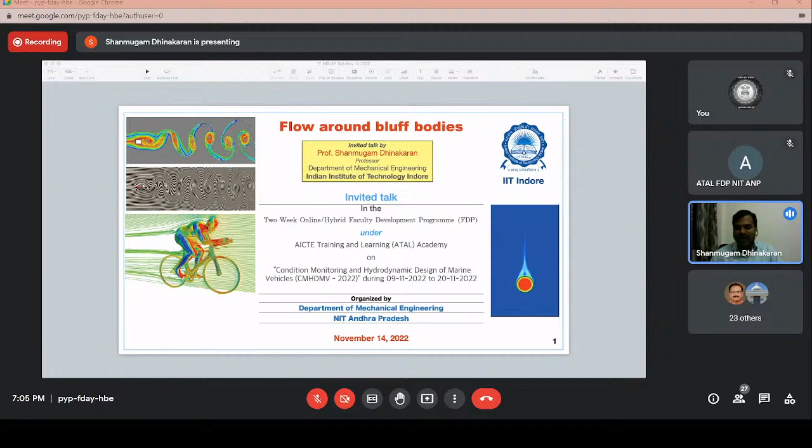I hope my slide is visible to everyone. Yes sir, it's visible. Thank you, I'll be giving about a 1 hour lecture on flow around bluff bodies. This is mainly a computational work. We work in the area of computational fluid dynamics. We do simulations using finite volume methods and lattice Boltzmann methods, using both ANSYS Fluent and OpenFOAM software.

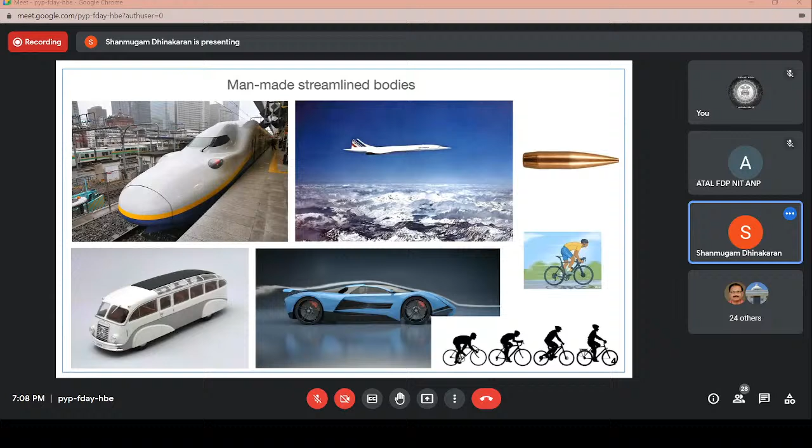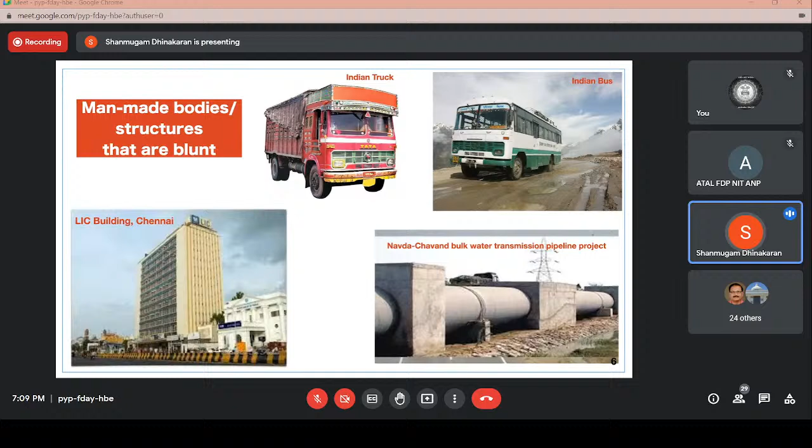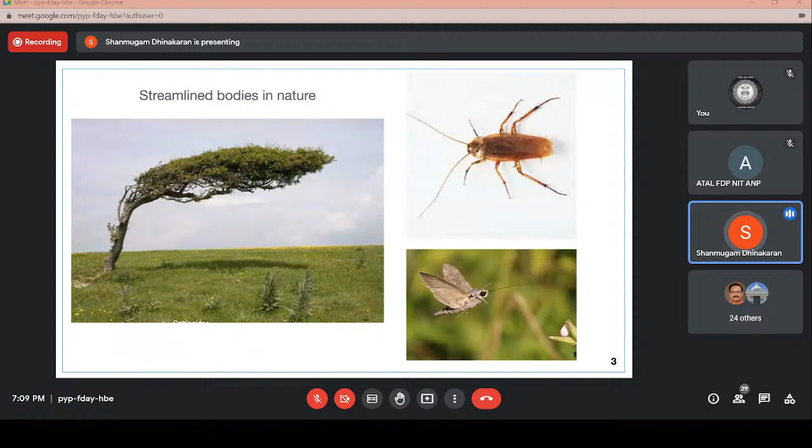Bluff bodies, as I told you, there is a significant difference between the streamlined body that you can see here, the fish, similarly this tree, these vehicles, and the birds here. The bluff body flows - what is a bluff body flow?

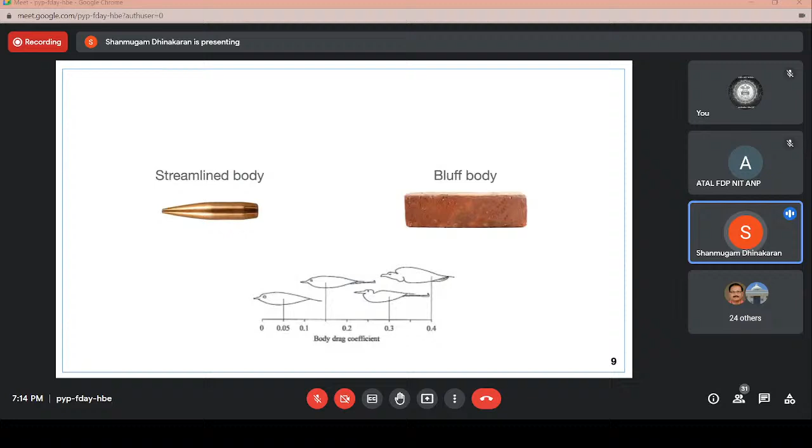In the coming slides, I'll be explaining what happens when fluid flows over a bluff body. As I told, flow over bluff bodies finds practical applications in cooling of electronic components, in heat exchanger designs.

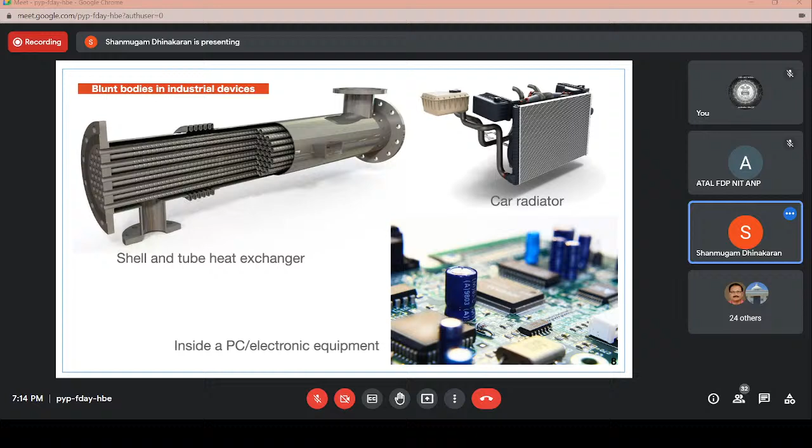This is something like during the summer season, when you try to cross the river, when the water level is less than the knee - you could see that behind your leg, two recirculation regions form. The water will be rotating. That is called the separated region. The flow velocities will be negative because fluid moves in the negative direction - it keeps rotating.

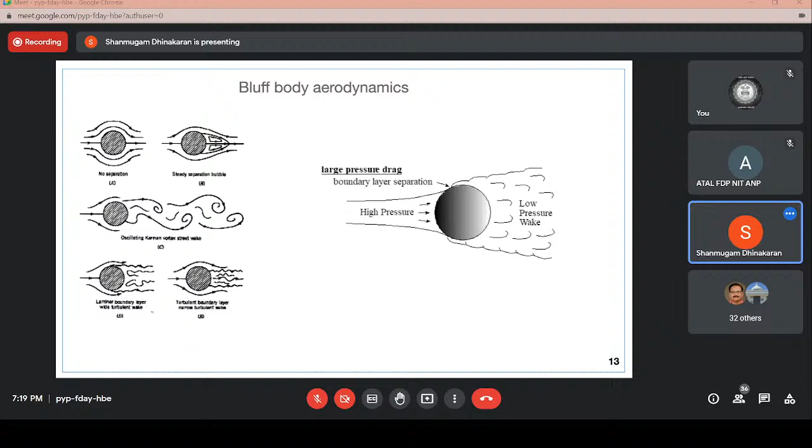It seems the side mirror accounts for 7% of the drag on the car. So in foreign countries, some car companies have removed the side mirrors and instead placed cameras, so that the drag due to the side mirrors reduces and we can save some fuel.

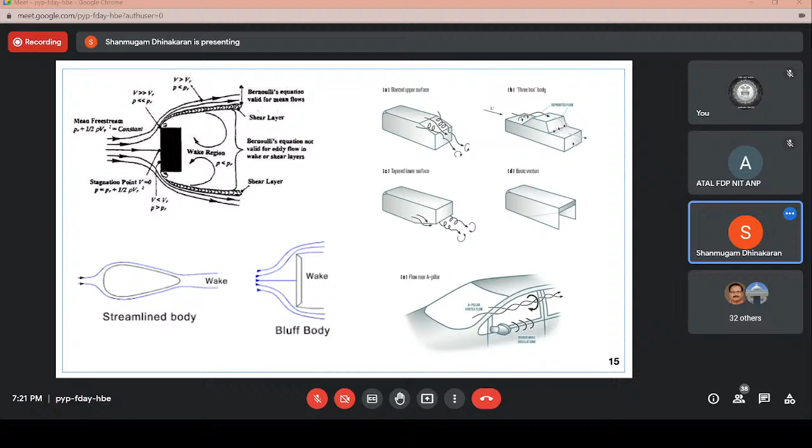This is the vortex shedding. So what really happens is that when fluid flows over a blunt body, such as a circular cylinder, flow separation takes place, and this vortex keeps on growing.

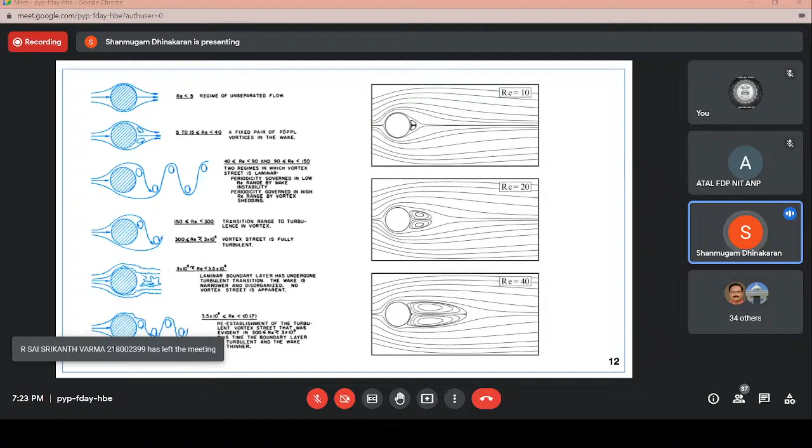When it reaches a certain Reynolds number, it cannot remain symmetric for longer. The vortex that is formed on the surface becomes unstable and starts shedding. Here, this one is a streamline, this is not a vortex.

In case of unsteady flow, the strength of the vortex changes. A vortex is nothing but recirculation. As I gave an example, if you cross a river during the summer season, behind your leg you can see vortices. The same thing is shown here.

When the fluid velocity is very high, the vortex on the top surface grows, and then on the bottom surface the vortex also grows. The top surface vortex keeps on growing and becomes unstable. That is the reason why it is cut off from the main cylinder and shed, as you can see, forming a row of vortices.

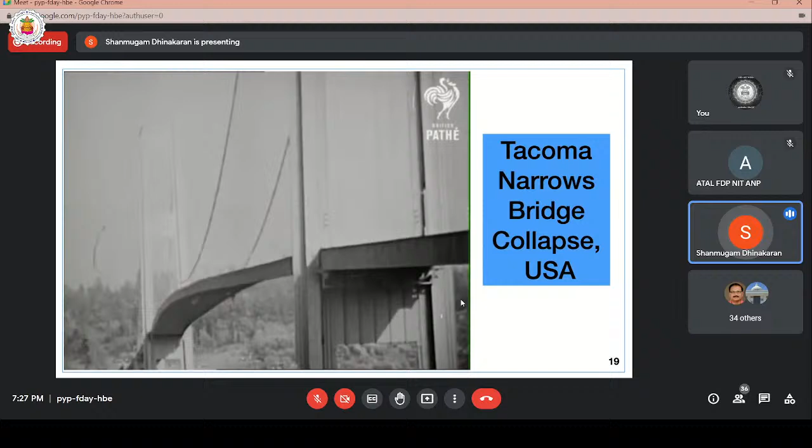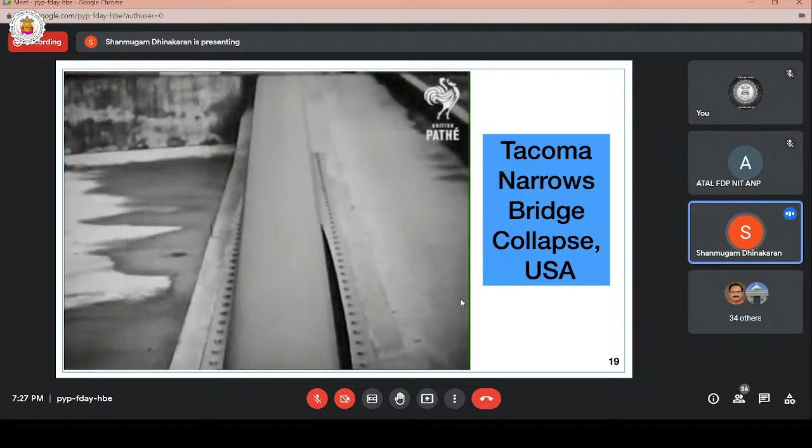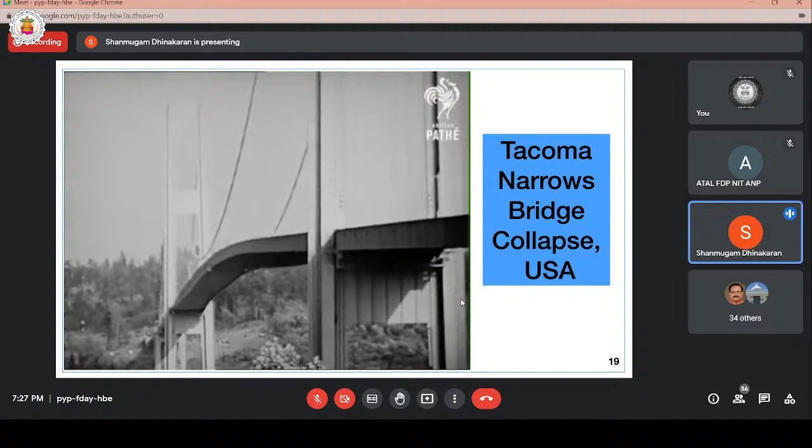Only a 35-mile-an-hour wind is blowing, but this apparently sets up a rhythmic swinging of the bridge, which increases with each swing.

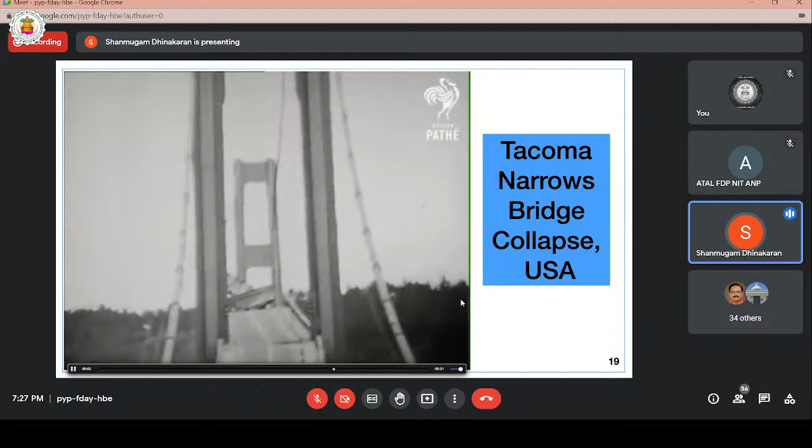Finally, the swinging road and the suspension cables give way and plunge into the water below. Fortunately, the only casualties were a car stalled on the bridge and a dog.

This bridge collapsed in the USA due to unsteady aerodynamic forces.

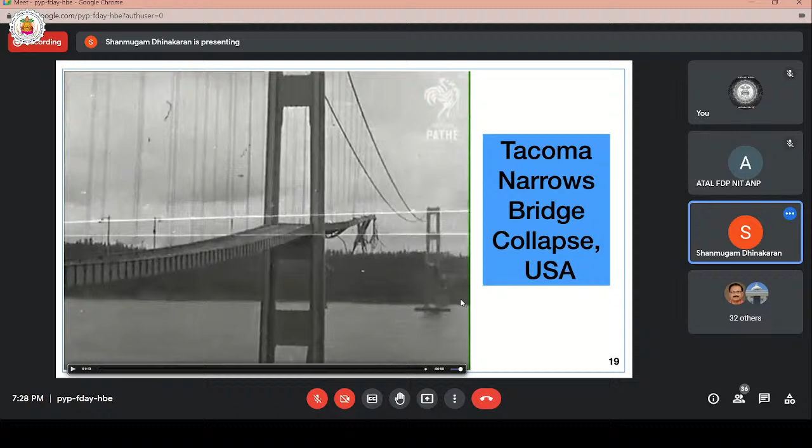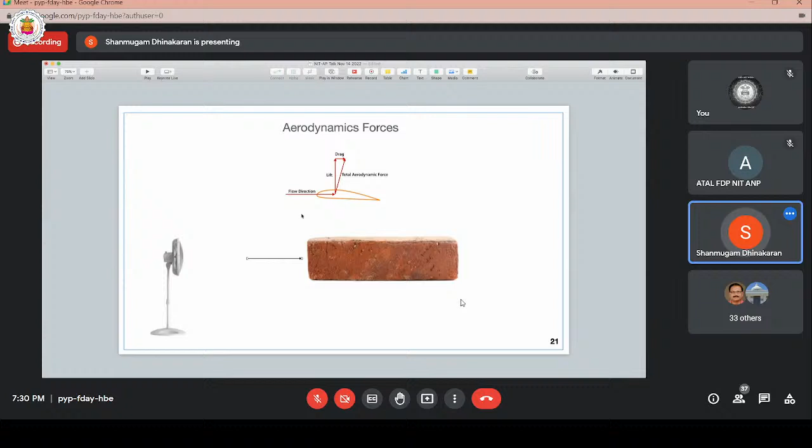When air flows, this is the pressure force acting on the front surface of the bluff body. This one is also the pressure force, but it acts in the opposite direction on the rear surface. This one is the viscous force, or shear force, acting on the top surface, and similarly this is the shear force acting on the bottom surface. So pressure force acts on the front surface, pressure force acts on the rear surface, viscous force acts on the top surface, and viscous force acts on the bottom surface.

All these forces are in the horizontal direction, so this gives rise to drag. Drag is due to the pressure forces on the front and rear, and the viscous forces on the top and bottom.

Similarly, when a fluid flows over the surface, shear forces also act on the surface. I'll draw this. This is the shear force acting tangential to the surface, marked in red. This force will try to push the body up. Similarly, the viscous forces act on the rear surface also, but in the opposite direction.

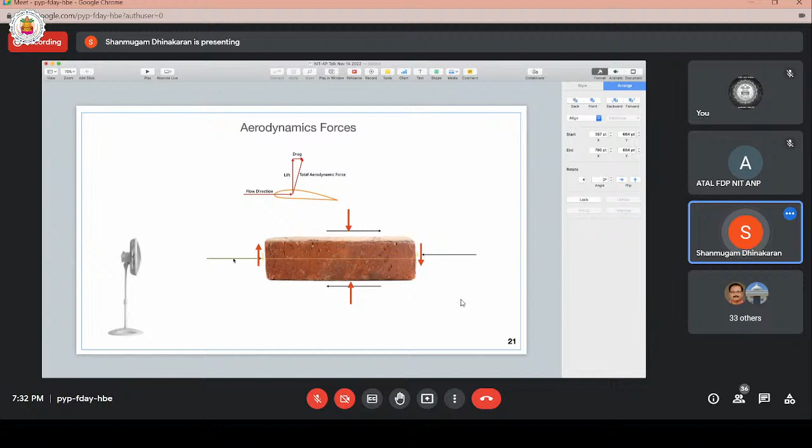Once we are able to know the pressure forces acting on the body as well as the velocities, from the velocities we can find out the shear stress: Tau is equal to mu times dou u over dou Y.

Firstly, I'll show you one of the works that we have done on bluff body flows. It's a very simple geometry. What you see here is a square body placed close to a moving wall. This is the same as you have a car, for example this one. You have a car, this car is considered to be a bluff body.

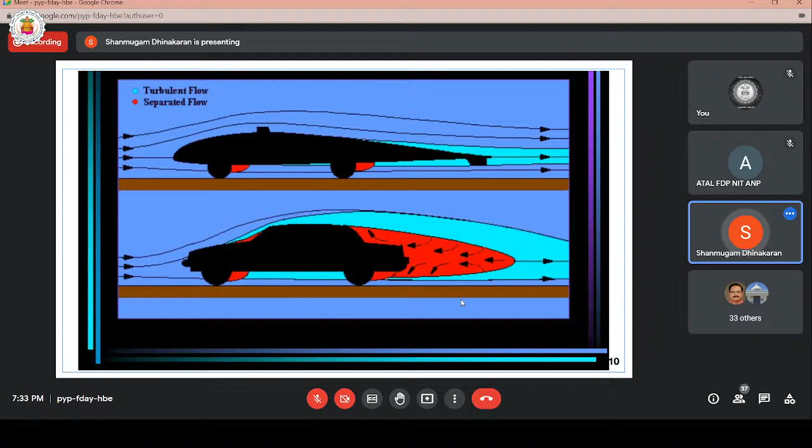I take it as a square body, and there is a gap in between. At the bottom also, you have the road. So I can do a simulation: instead of taking the actual geometry of the car, I can take a square body or a rectangular body. When the car moves, the road is stationary and the car is moving. The similar configuration we have taken here.

You have a square body, and below it you have a plain wall — you can take it as a road. This wall is moving and this cylinder is stationary. It's the same as if the wall is stationary and the cylinder is moving, that is, the car is moving.

So what we did is we varied the distance between the cylinder and the moving wall. We did a CFD simulation using our own code. We assume that the flow at the inlet is a uniform flow, and this one is the mesh.

When we do a CFD simulation, close to the body a large gradient in velocity occurs, so one has to take a fine mesh there. Far away from the body, the velocities won't be changing, so we have taken a coarse mesh over there. Here you see a very black region because the mesh is very fine.

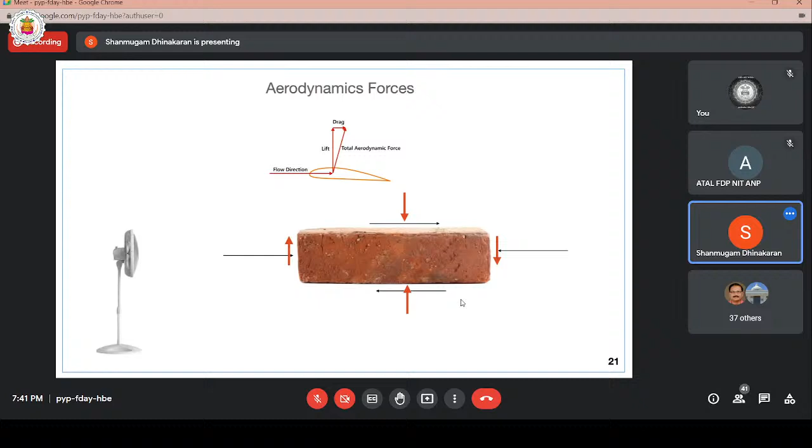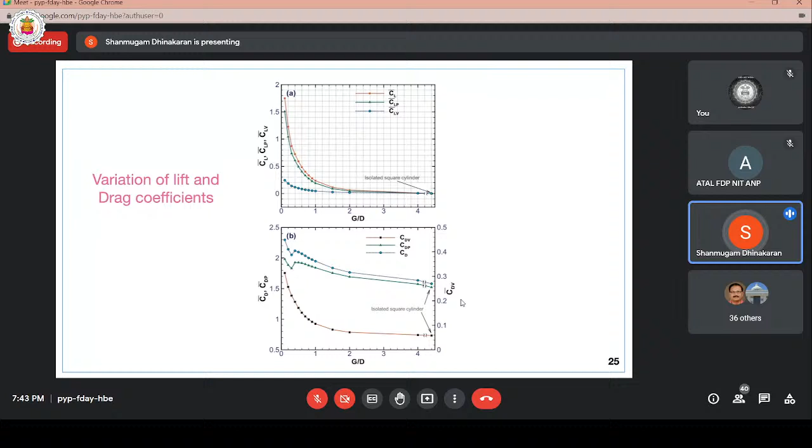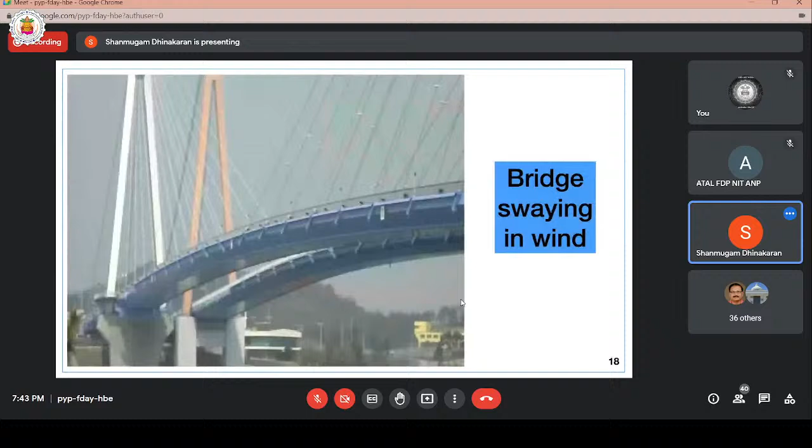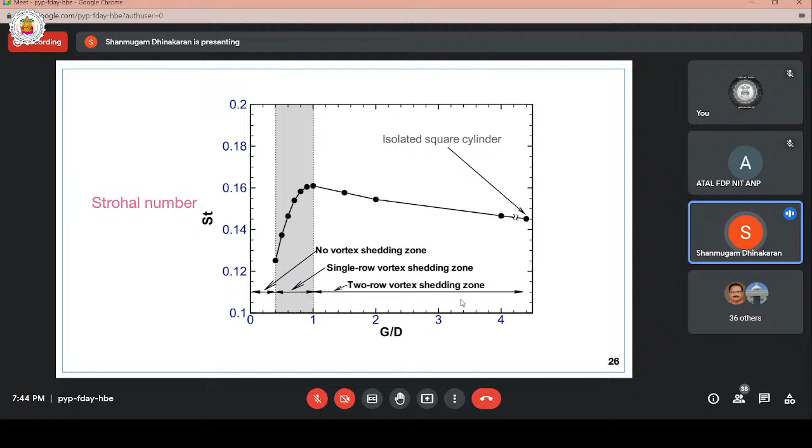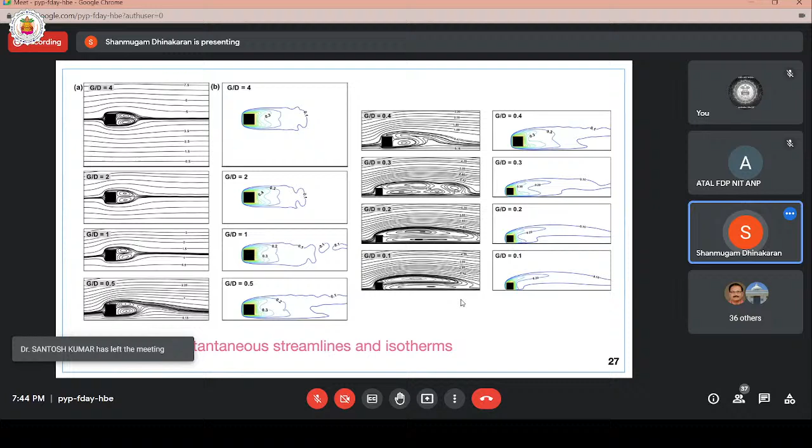These are some of the streamlines shown for different gaps, and this is the isotherms. These are all instantaneous streamlines and isotherms drawn at a particular instant.

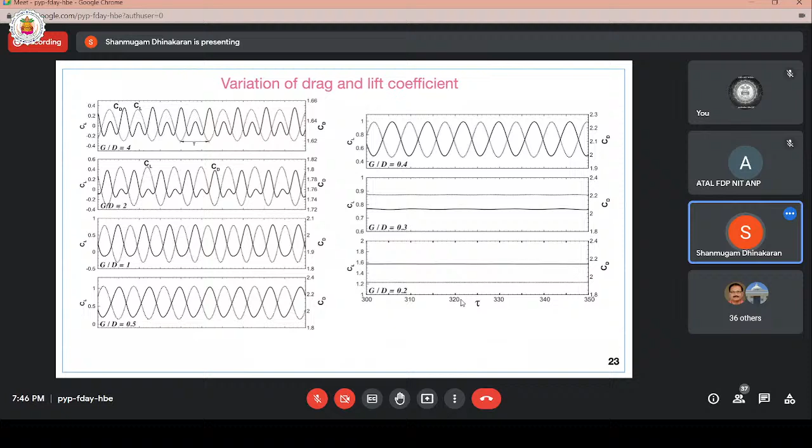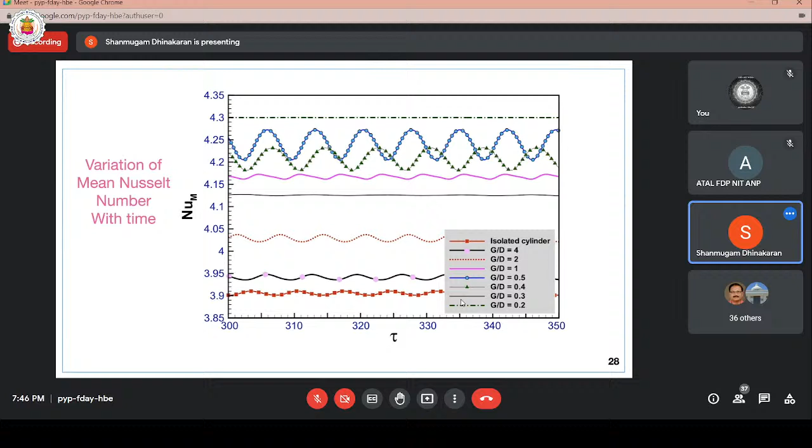Now we were interested in knowing the amount of heat transfer from the surface of this body. This plot shows the variation of heat transfer as a function of time. You could see when the gap is 0.2, the flow becomes steady, and as a result the Nusselt number also becomes steady.

Nusselt number is nothing but the ratio of heat transfer in convection to the heat transfer in conduction. We're just comparing: if this is the amount of heat transfer in conduction, how many times has it increased in convection.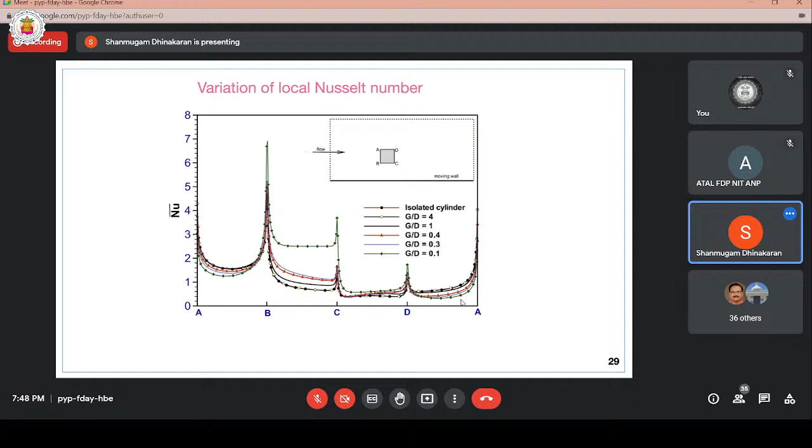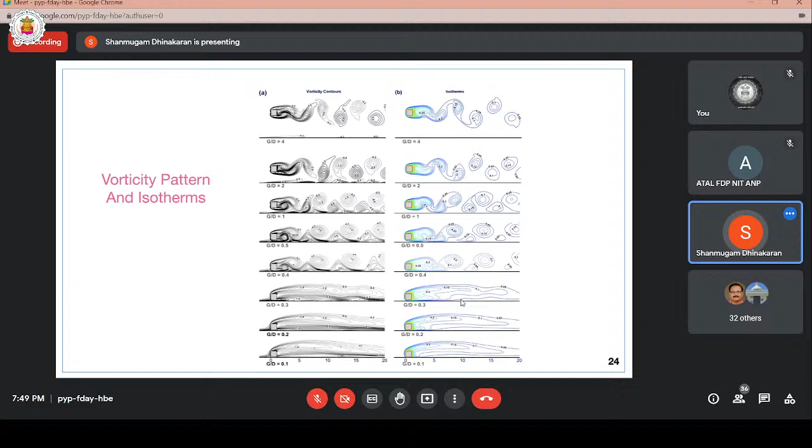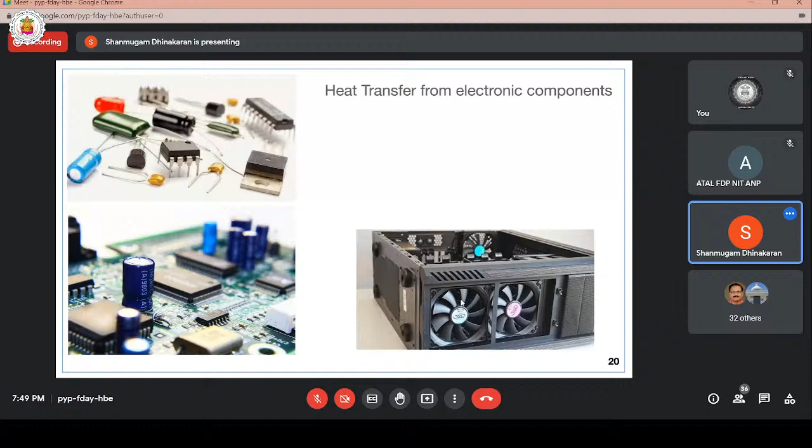That means when I keep this body very close to the wall, I would achieve very high heat transfer rates. For example, in electronic components in a CPU cabinet, suppose you have a motherboard with electronic components fixed on it. When you keep it very close to the wall, when air flows over these electronic components, the heat transfer would be highest when the gap between the body and the wall is very small.

You can see here, when the gap is 0.1, the enhancement is something like 28. And then it slightly decreases. Then due to change in flow pattern, it increases. And finally it reaches a single cylinder value.

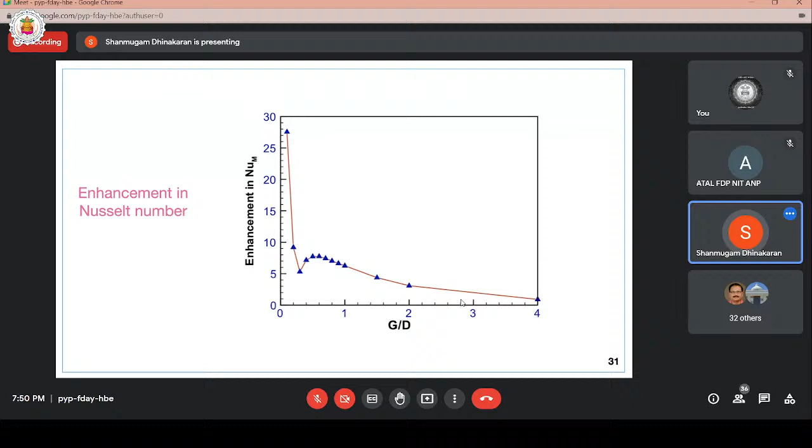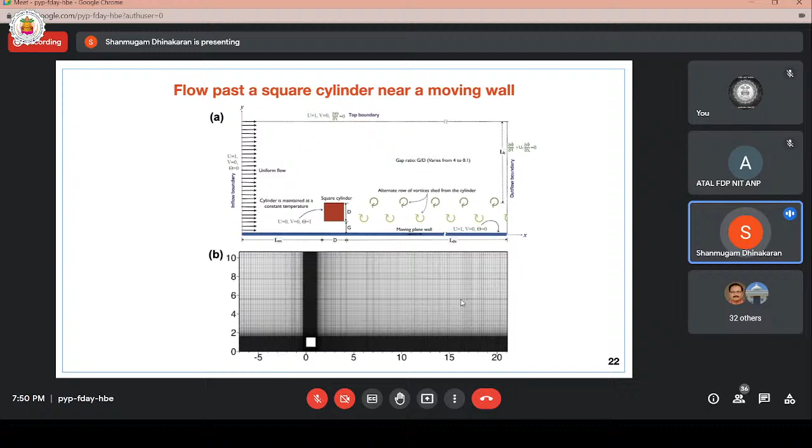This is all about flow around a single cylinder near a moving wall. This is relevant to flow around vehicles as well as cooling of electronic components.

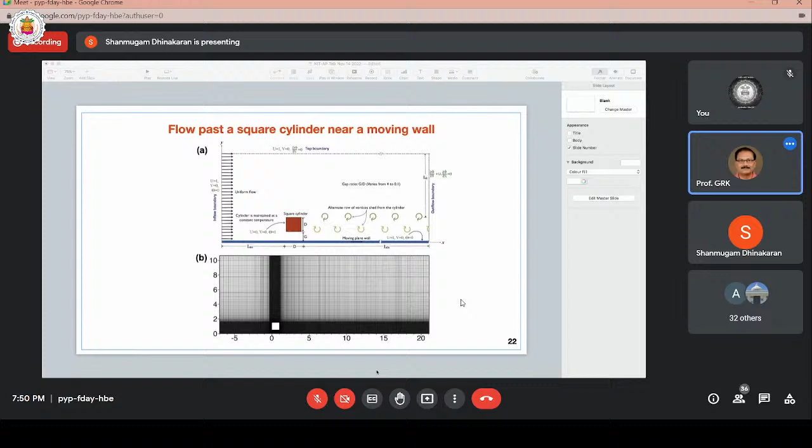I'll stop now. Sir, is it over, sir? Lecture is over, sir. Thank you very much, sir. Even a layman can understand your valuable session, it's really useful, sir, from fundamentals to start. I request all the participants, the feedback form will be given later. Any questions, please ask, sir. Sumande, any question? Rakesh Kumar? No, sir, every day you are asking a question, I think you don't have any question today. It's not that, sir, you have clarified very nicely. Okay, I will ask a question related to optimization.

Can we optimize these curves, what you're talking about, like the drag versus others? Is there any state of the art in this domain, using optimization techniques, be it gradient or non-gradient, to optimize these curves so we come to know what parameters give the optimized function for the problem concerned?

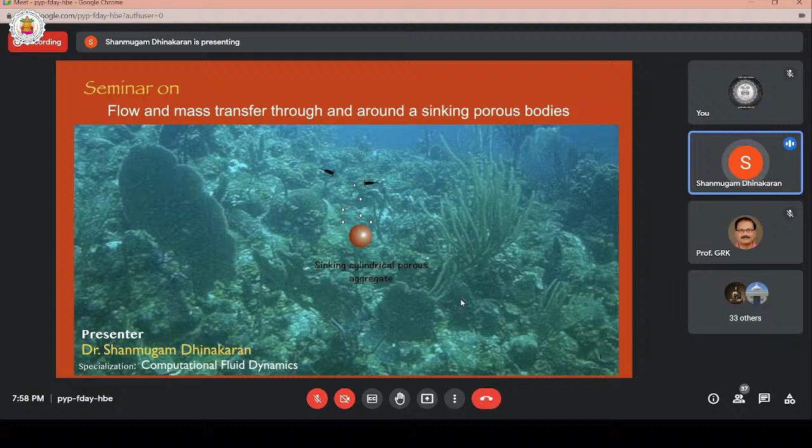So I'm going to give a short presentation on flow around porous bodies. The practical example here, what you see is a sea, an ocean, the deep ocean, and you see a fish over here. So what happens is that inside the ocean, you have this... I'm sorry, just a minute.

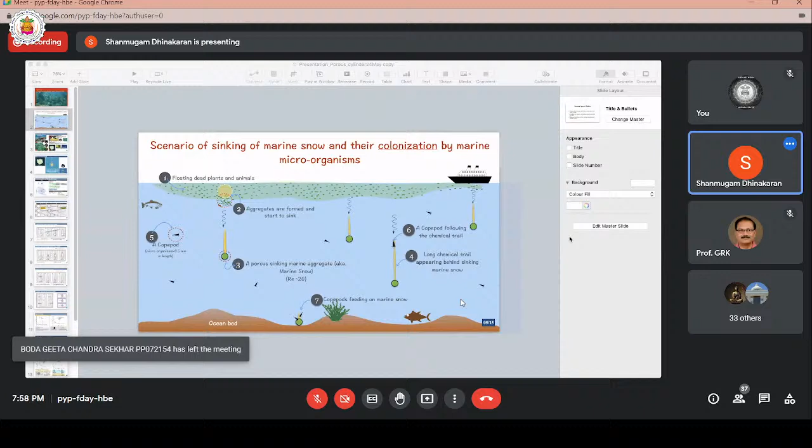So inside the deep ocean, the temperature of the water is very low, maybe like 0 degrees Celsius. So whenever plants in the ocean die, or animals die, they float on the top. As written here: floating dead plants and animals. When they float on top, some bacteria and other things colonize over them, and this forms what is called snow.

It's called marine snow. So I repeat, when dead animals and pieces of flesh or dead plants float, due to the lower temperature, they become snow. This snow starts sinking, becoming an aggregate, as written here. Aggregates are formed and start to sink. These are all a lump of ice in which you find microorganisms, because it's flesh, dead tissues.

So what happens is that because of this flesh, oxygen and nitrogen are formed and released from the dead plants or dead animals.

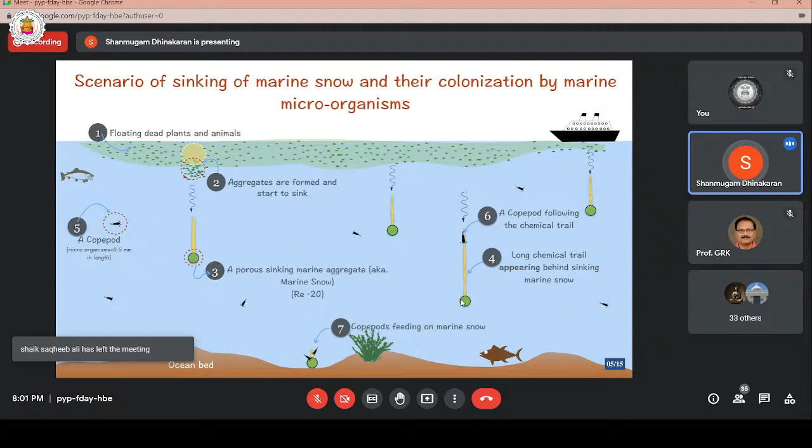This kind of study on how marine snow sinks and how the concentration of dissolved substances leaks is of interest to marine microbiologists. They are very much interested in knowing how these animals grow and what is the interaction between the animals and the living atmosphere here. That's their objective.

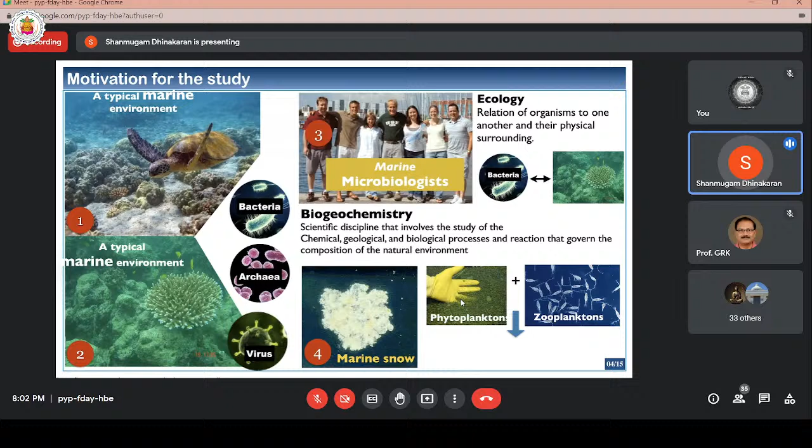So you see here a marine snow. This is an actual marine snow, it forms like a spherical ball. These are some of the microorganisms. Whenever this spherical ball or marine snow sinks, the concentration of substances - oxygen, nitrogen, everything - starts leaking. So these microorganisms, called zooplanktons, will try to follow the trail and grow over this. Based on this concept, we try to do a numerical simulation.

Again, I'm showing you this is a marine snow, formed on the ocean surface. This consists of dead plants and dead animals, small pieces of flesh. You can see here, marine snow is sinking from the top of the ocean to the bottom, and these microorganisms will try to follow the leaking substances. How they identify that the snow is sinking is through the leaking substances.

So what we did is we tried to consider a porous cylinder, or I can say a porous sphere. We did a similar simulation as shown before. This is a porous region. Around this, we took a small domain, a circular domain, which is called the clear fluid region. So we have the porous region here and the clear fluid region.

So for the clear fluid region, we used the continuity, momentum, and concentration equations. When we solve the continuity and momentum equations, we get the velocities u, v, and pressure. When we solve the concentration equation, we get the concentration distribution. Since this is a porous region, we have used a model called the Darcy-Brinkman-Forchheimer model. These equations - continuity, momentum, and mass transfer - are for the porous region.

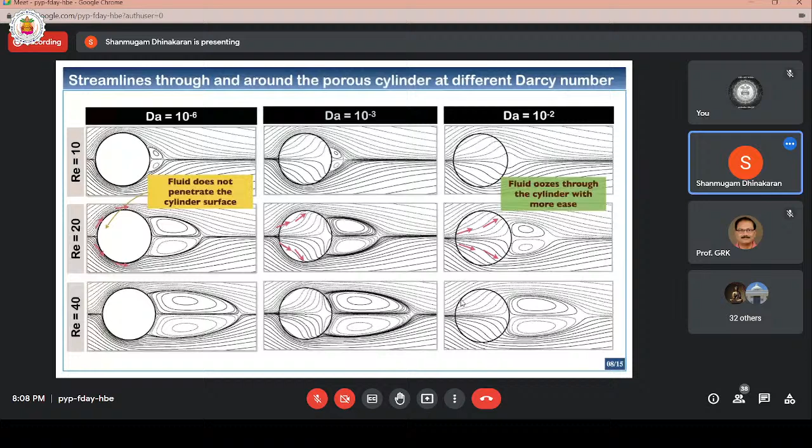At Darcy 10 power minus 3, when the pores are open, fluid flows inside - you can see the fluid flowing inside. When the porous body is highly permeable, that is Darcy 10 power minus 2, when the permeability is very high, you could see there's almost like a through flow here. This simulation has been carried out by solving the continuity, momentum, and mass transfer equations.

We use the porous media models called the Darcy, Brinkman, and Forchheimer model. The Darcy model is usually used for simulating flow in porous medium.

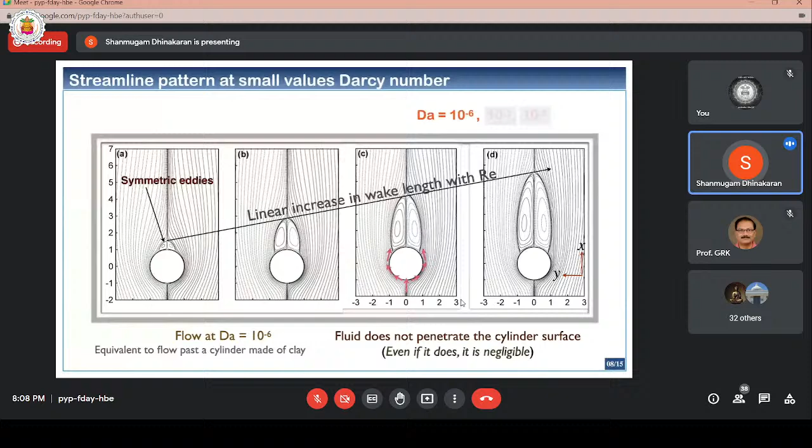This one, same way, we have shown the wake region, the recirculating eddy behind this cylinder here. This one is at Darcy 10 power minus 3 - you can see the fluid flowing inside. At Darcy 10 power minus 2, you see again a through flow. At Darcy 10 power minus 6, the same thing - fluid cannot flow inside. When it is highly porous, fluid almost flows through this body, as you can see here.

The same way as shown in the previous slides, we tried to plot the variation of drag coefficient with time, and the variation of drag coefficient with Reynolds number here. These are some comparisons of our study with existing ones.

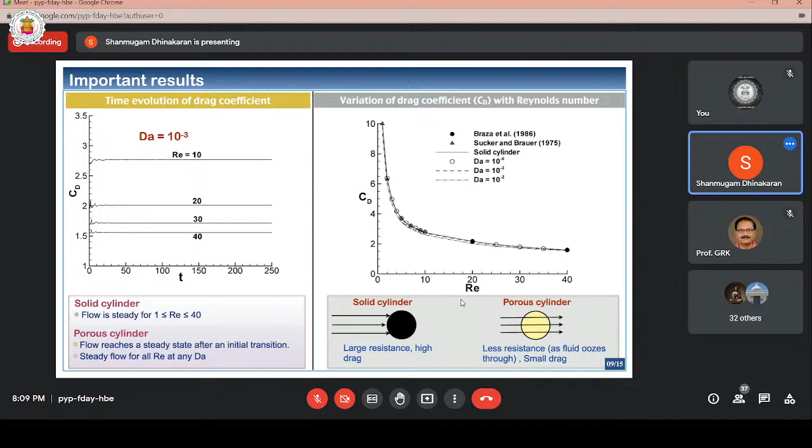Again, the variation of the recirculating region length for different Darcy numbers. What really happens is when fluid flows over a surface, flow separation takes place. For a solid cylinder, flow separates from the cylinder and you have a recirculating eddy at an angle of 128 degrees. But in case of a porous body, since there is fluid flow through the body, this angle shifts to the rear side. That variation in separation angle is shown here for different Darcy numbers and also for the solid cylinder.

In case of a solid cylinder, what really happens is flow separation. I'll show you here - at Darcy 10 power minus 2, fluid climbs over the surface, and you don't see any recirculation eddy here. So for example, here you see a recirculating eddy.

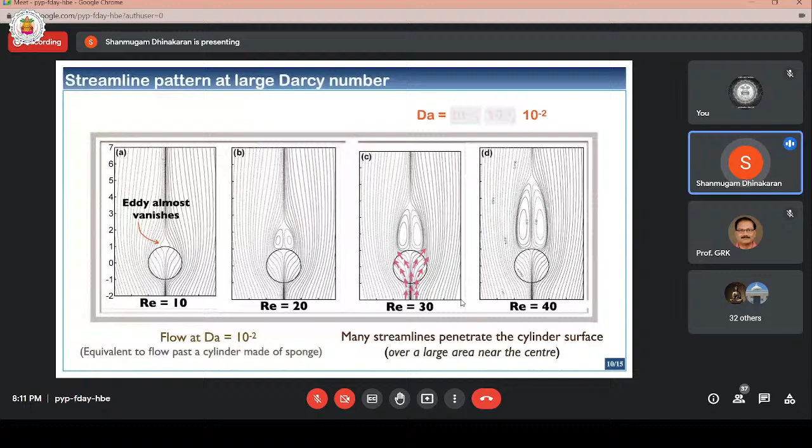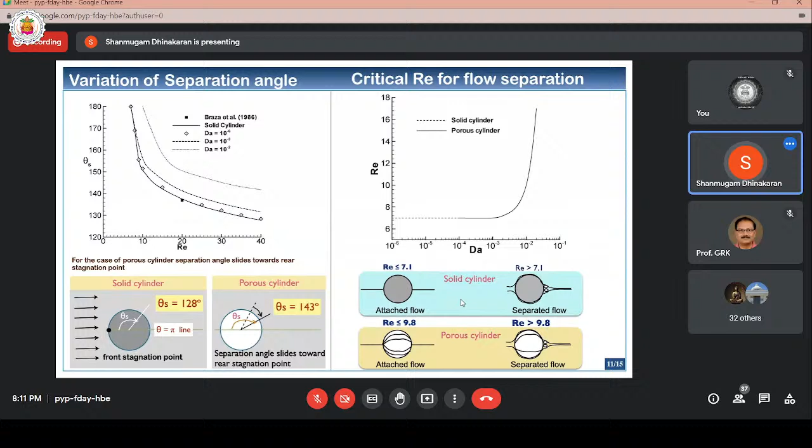We tried to see at what Reynolds number this recirculation eddy appears. We found that for Darcy number 10 power minus 2, the recirculation eddy appears at Reynolds number around 10. But in case of a solid body, the recirculating eddy appears at around Reynolds number 7. I'll come back to the previous picture I had shown before.

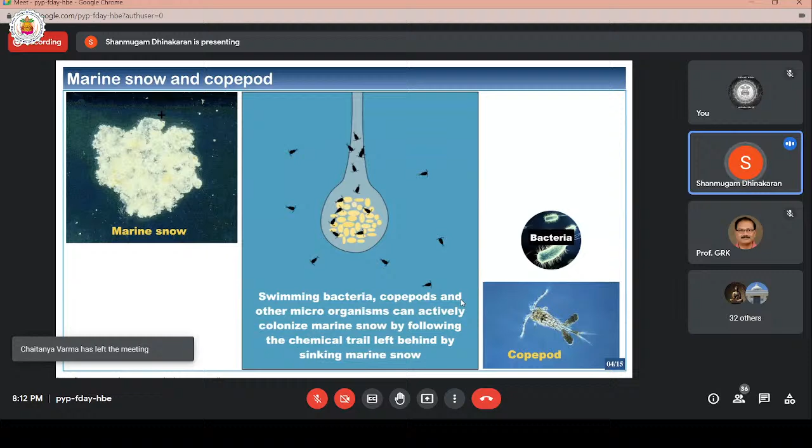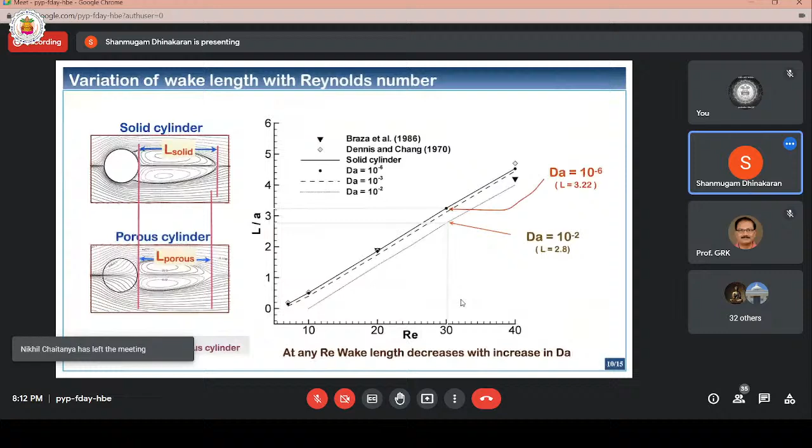In this porous snow, when it sinks inside the ocean, whatever contents, dissolved oxygen or nitrogen contents are there, that will leak. So by solving this mass transfer equation numerically using a finite volume method, we plotted the concentration contours.

You can see here at Reynolds number 20 and Darcy 10 power minus 6. That means you have a chalk piece, you dip it in red ink, and then you take a tank full of water, and drop the chalk piece inside. What happens is when the chalk piece keeps going down, you would find that on the corners, the dye or the ink would get washed away.

This is at Darcy 10 power minus 6. At Darcy 10 power minus 2, that means it's highly porous or highly permeable. This one is not permeable. Although it is porous, it does not allow fluid to flow through. This one at 10 power minus 2 means it is highly permeable.

You can see at different times, t equal to 0, 5, 10, 15 seconds. So water flows inside, or when the chalk piece comes down, fluid flows inside and tries to wash away the fluid. It's simple, like you take a sponge, dip it in ink, and throw it inside a well. What will happen is, if it is highly permeable, whatever contents are there inside the sponge will come out. The same thing, it will come out. So the same thing you can see here.

We also observe that a long tail is formed, the concentration trail formed behind the cylinder, and you can also see that since fluid flows inside the body, it's completely washed away. This we can take as marine snow, where the contents are leaking when it sinks down.

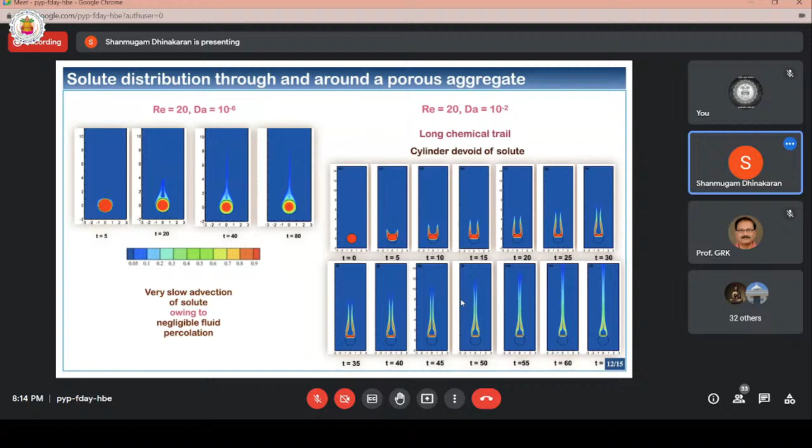So I've shown an animation here. This is taken as a marine snow. You see here.

These copepods, microorganisms, the ocean is very large. What they do is they like to feed on this marine snow. They will keep on moving here. When they come in contact with this leaking substance, they immediately know that, oh, marine snow is sinking. I have to go, and here is where the marine snow is. I can go and feed on it. I can reproduce. So that's what happens in the ocean.

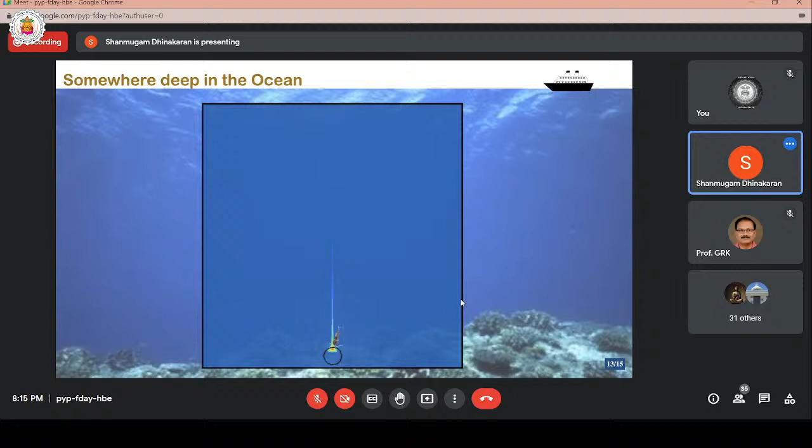This one again, I'm showing you. This marine snow is sinking. These copepods are very tiny organisms. They are very small. They keep wandering here and there in search of marine snow. It comes in contact now. See, it has come in contact with this leaking substance. Now it comes back, and it has identified this marine snow, and goes further down, and lives on it. The size is exaggerated here, the marine snow size could be 100 times more than this copepod microorganism.

So that's all, this is over.

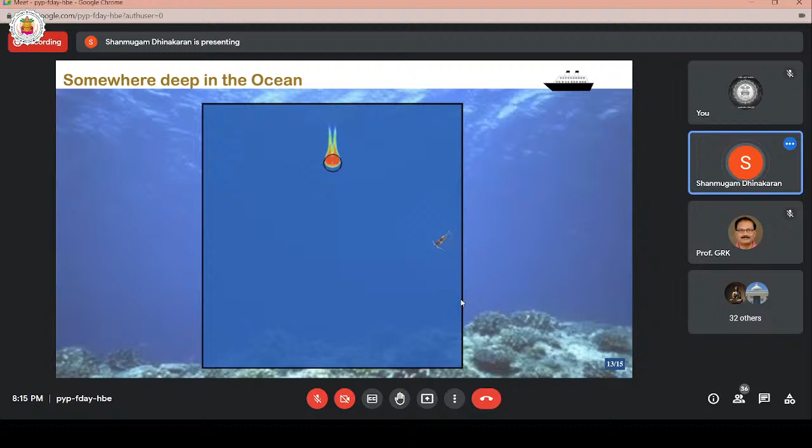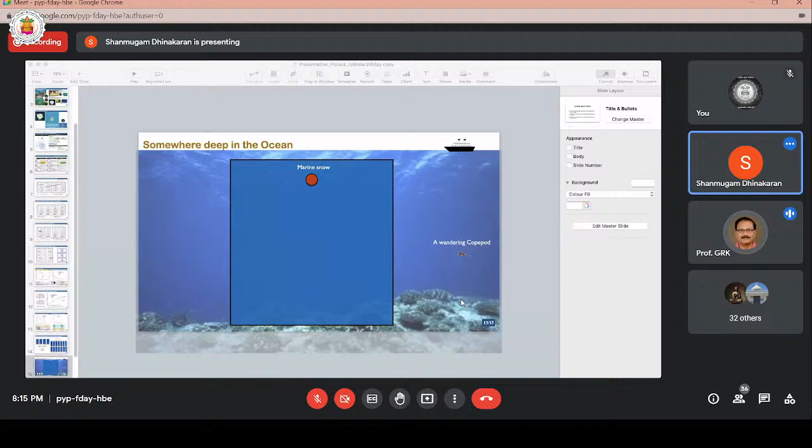Fine, sir, I'll stop now. Sir, thank you very much, sir. Thank you, okay, very wonderful session, sir. I missed your classes, really.

Here we have to learn how, even though you are teaching very slowly, everybody has very much interest that you have kept in the whole class. Really, your teaching ability is very much good, sir, as I'm a little bit senior to you. Thank you, sir, I think I learned something from you. Even with my always very big voice I use to teach, but with a small, low voice also, how beautifully one can teach, I understood with you.